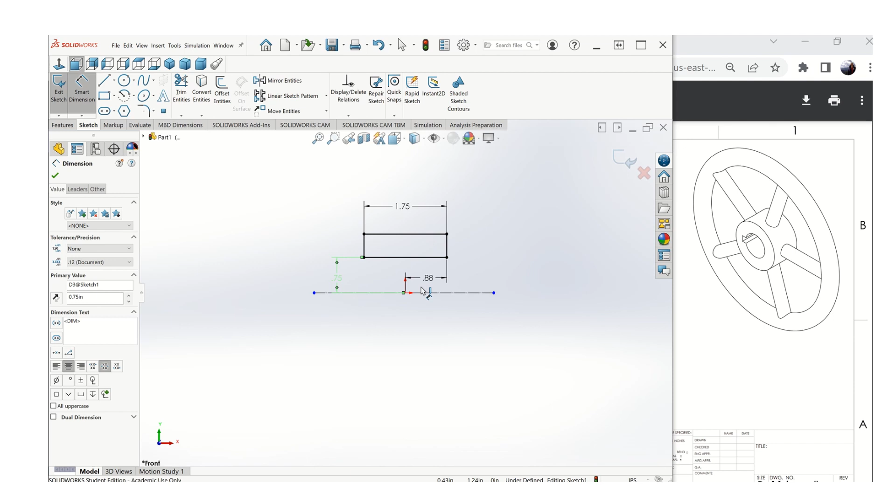And then this hub itself is a 3-inch diameter, so I've got to do half of that, because remember, when I revolve it, it's going to double.

So that's one piece. The other piece is the cylindrical part here, and we want to line it up there. I probably should just go ahead and put a construction line.

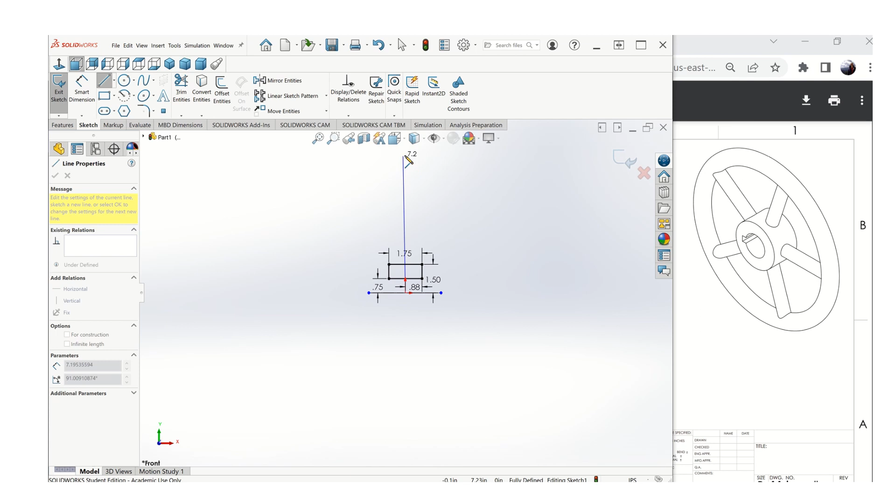And it needs to be a vertical line. There we go. So I'm going to put this on the line. That is this rim of the part, and that diameter of that rim is 1 inch. So that's the full size there.

And the distance from the origin to the center of that, because it's... let me try that again, from the origin to the center of that. Don't know why it doesn't like that. Let's look at this for a second.

So I'm going to revolve that hub, also revolve this. That's on a 10-inch diameter. We're going to go off the center of there, from the center of there to the center of the part. It's going to be a 5-inch distance. So that's 5.

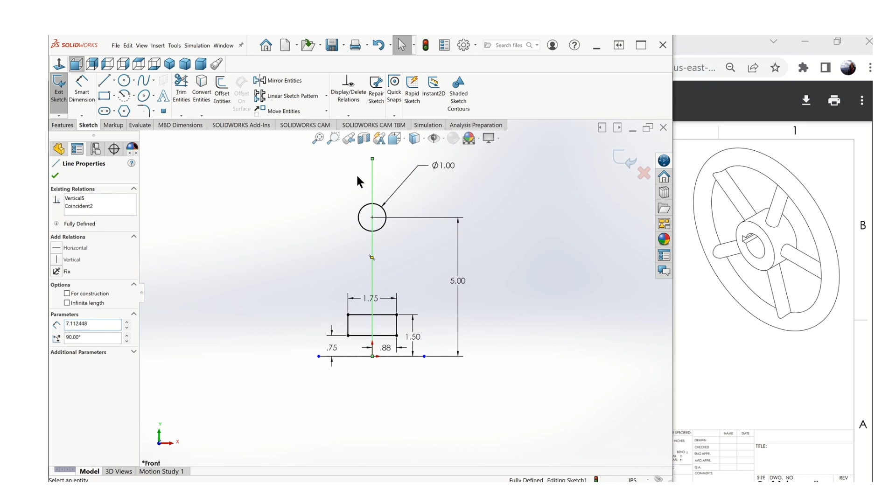I'm going to make that a construction line because I don't want that interfering with my geometry of my part. So I'll stop there and finish the sketch. Got these two pieces here.

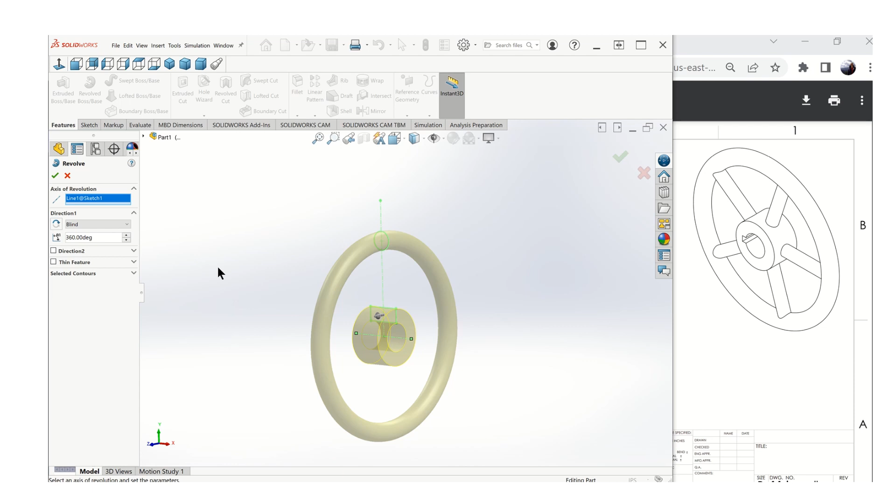I'll go to Features, Revolve Base. Now it's asking me for the axis, which is going to be that. And there's two areas there, so it will revolve both of them unless you deselect one. So that's the basic part of this wheel here.

Now the other tricky part of that is creating the spoke. So the way we're going to do that is, let's turn some planes on here. Actually, I'm going to turn all of them on, so it's going to get a little ugly here for a minute.

What I'm going to do is put a sketch over here, and then I'll extrude it to the rim and extrude it back to the hub to create one of these spokes, and then I'll do a circular pattern.

So in order to do that, I'm going to go to Reference Geometry, Plane. I'll click on this plane, and I'm going to flip the direction because I want it to go this way. And I just want it to be somewhere there in the middle.

Remember, that was a 5-inch radius, so what if I make that 2.5? Now, it doesn't have to be in the middle, but that works. So now I've got that plane. I'm going to turn this plane off.

I'm going to sketch on this one. I'll leave this other plane on there, these other two for reference, and that should help me with the center of this. Okay, now let's see what this looks like. I may have to change my visualization of the part.

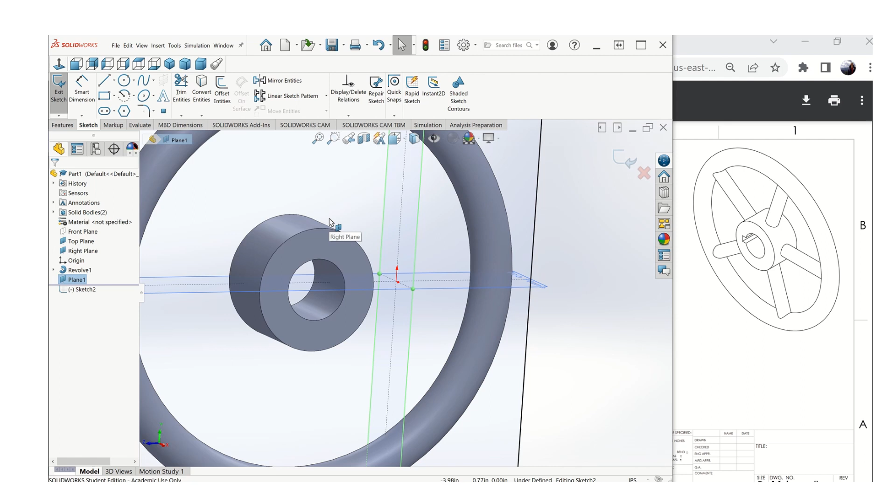So it's that right there, there we go. I'm going to do Control 8 to spin it around. Now I can't see what I'm doing here, so what I can do is change...

I don't have to go up there. I can go over here to display style and I'm going to get a wireframe.

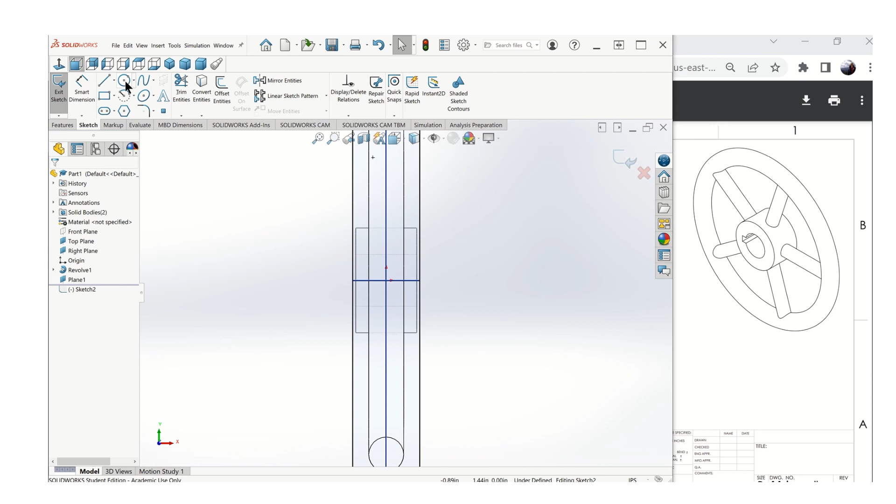Now I'm going to do a sketch right there. It's just a circle, and now that's going to be the diameter of the spoke. And if you look at the drawing, the diameter of the spoke is not the same as the hub. It's 0.75.

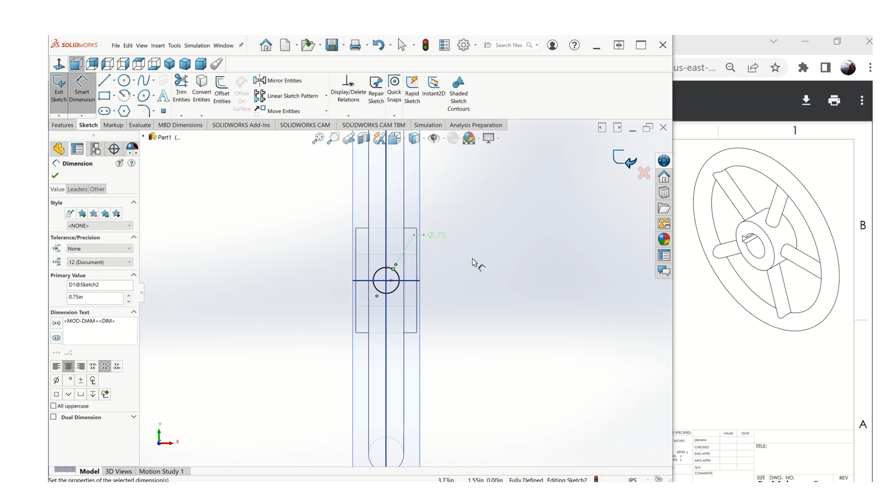Right, so it's definitely smaller, it should be all I need. Now look at what I have. So again, I'm in wireframe mode, so it's a little bit trickier to see, but I've sketched this, and that's going to be one of my spokes.

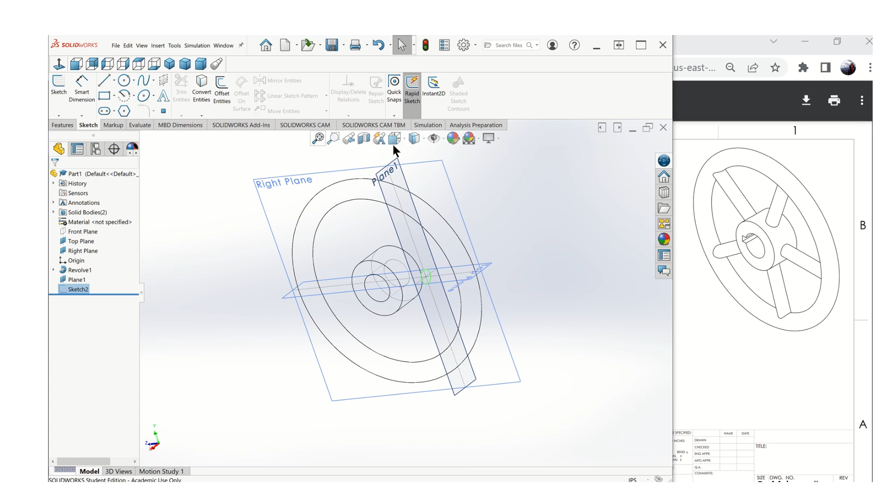And that plane, you could take this plane and go up with it and do the same thing. I just chose to go that way to the right. Let's finish our sketch, and change back to this format.

Now I will go to, I just want to do an extrude, I don't have to revolve. Click on that circle right there. And now the settings are going to be important, because I'm going to go up to next, and that's going to go that way until it hits there. And now that's in direction 1.

So you see this heading, I need to go direction 2. So click a check mark there, and I'll do the same thing. Go up to next, and then that'll take it up to this side. So direction 1 goes from here to here, direction 2 goes here to there. I could do it in 2 separate extrusions, but it's not necessary.

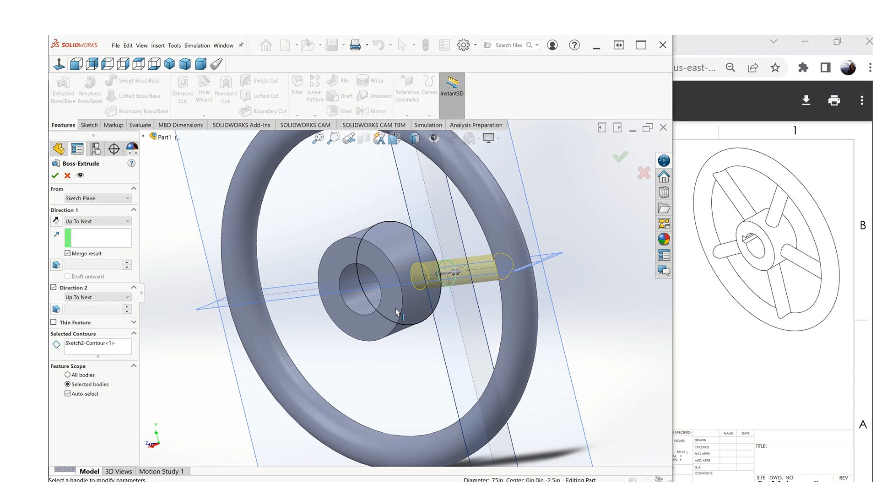Say OK, and there is my spoke, and it's correctly matched, mated. I'm not violating any laws of physics or anything like that. So now I have one spoke.

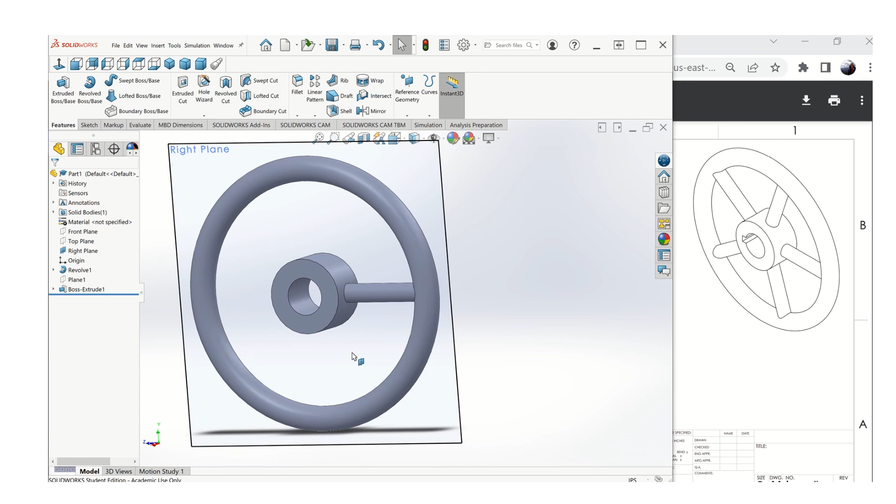Let's go back to our part. So what I did was generate this spoke here. Now I need 5 spokes around the circumference of that. So let's see, if I right click, I can turn off all these planes, it's a lot easier to see. I don't need that. You know what, I'm leaving that on for now.

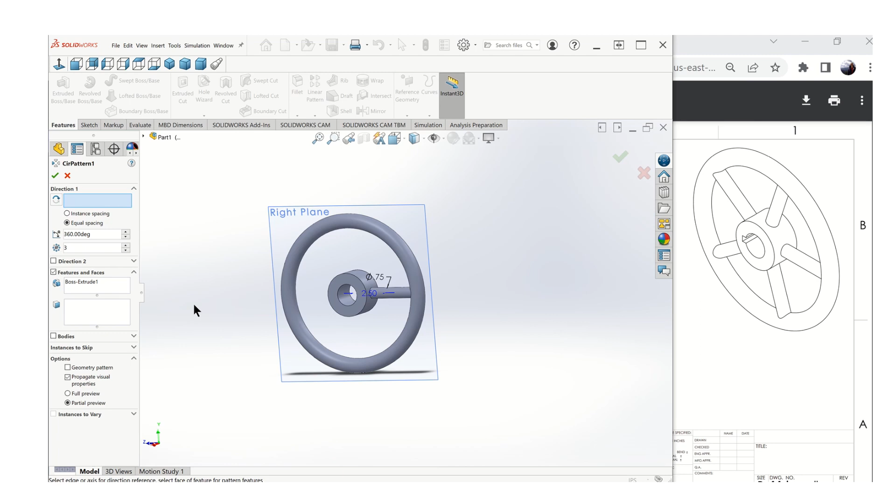Let's go up here to the top. We don't want a linear pattern. Go back to features, circular pattern. It's asking me for the features and faces. It's just that cylinder right there, and then go up where it says direction, highlight that, and then click on the center of your part, and then we need to look and see, we need 5.

So in there you want to put 5 spokes, and you can sort of see the pattern showing up. And there is my wheel, right? So I revolved those 2 pieces, and then I created that plane, extruded 1, and then a circular pattern.

The only piece that's left is there's a keyway in there, and that keyway actually is opposite of this one spoke. So it may or may not be randomly oriented, but let's assume it needs to be opposite that one spoke. So let's turn this way, and I'm going to click on that side because that's the view I want to see. So I need to put a keyway in there.

So let's just do a new sketch right on that surface there, and you can just use a rectangle there. Oops, forgot to look how big that key is. It is 1 inch from the center back, and it's 3/8 tall. So I need to dimension that, that dimension there is 0.375.

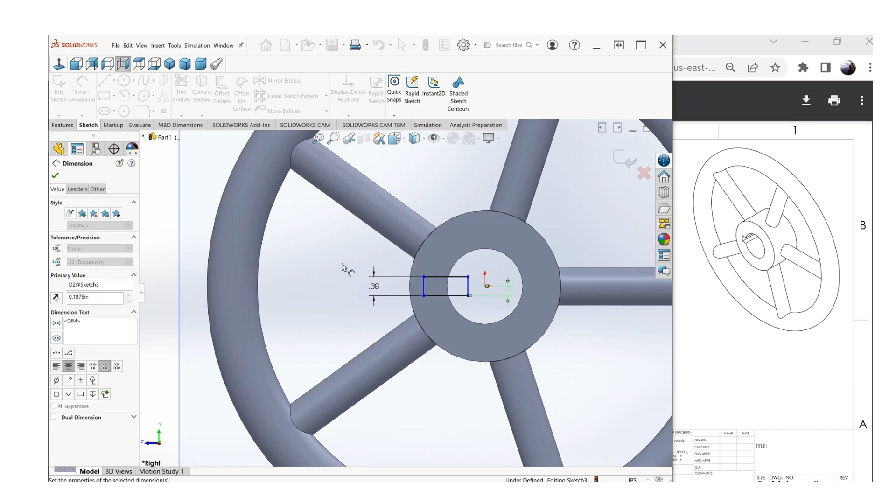Now you need it to be centered, so click on the edge and then to that center right there, and that's going to be half of 3/8, which is 3/16, which is 0.1875. That'll center that. As far as length goes, we don't really care about this part, what we care about is how long the key is.

So if you go from there to the center... may have created a problem for myself. Let's see. No, we're good, that dimension was 1 inch.

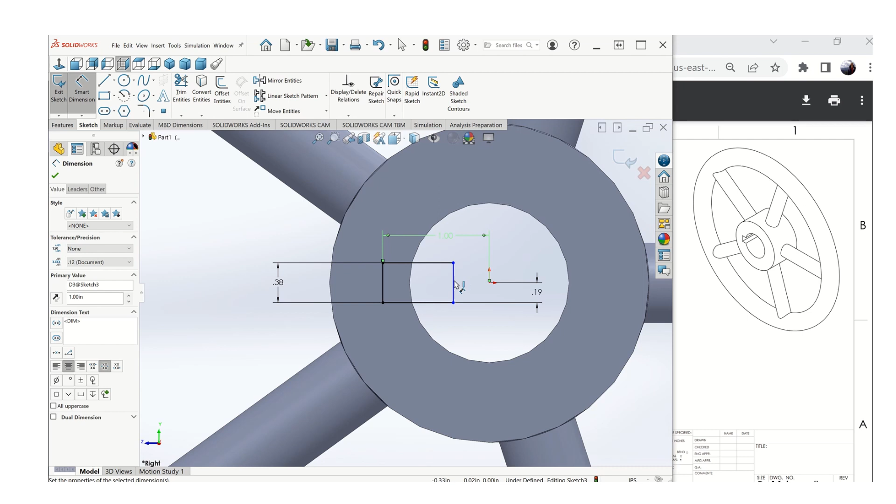Again, I don't care about this extra part, you can just leave it there. I don't care about that dimension as long as it's going to cut out that material right there. So there is my sketch on that face. Finish that.

Exit my sketch, go to features, do an extrude cut, and I need to go through all. And that creates my keyway. Right, so that looks exactly like this part, or it should at this point.

Now notice a couple things. We got a front view, we got a right side view that is in fact a section view that allows us to dimension these features without them being hidden. Also, they did a detail view of this keyway because it's a little tricky to dimension. You can fit it on there.

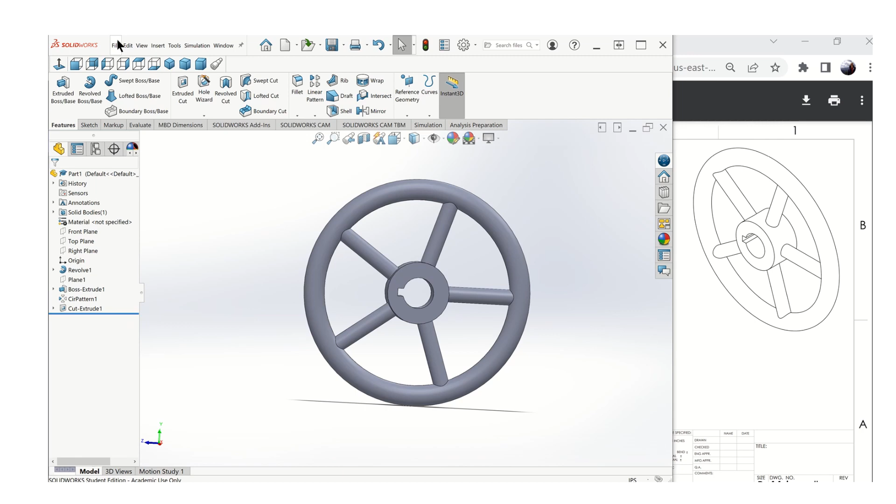Certainly. Let's turn off that right plane, we don't need that anymore. So let's save that, put it in the right folder. And that's going to be 11-inch pulley. Put on a drawing sheet.

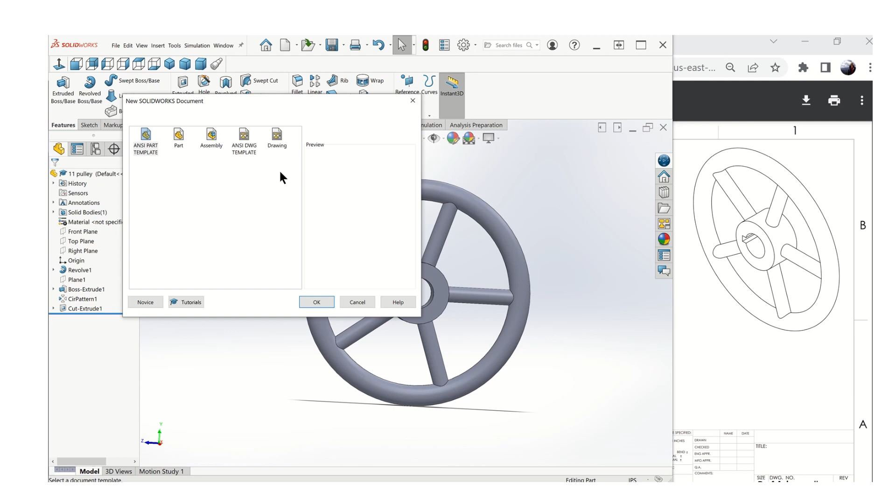Let me open that up and expand that. We want to just recreate this sheet right here, so follow along, should be fine.

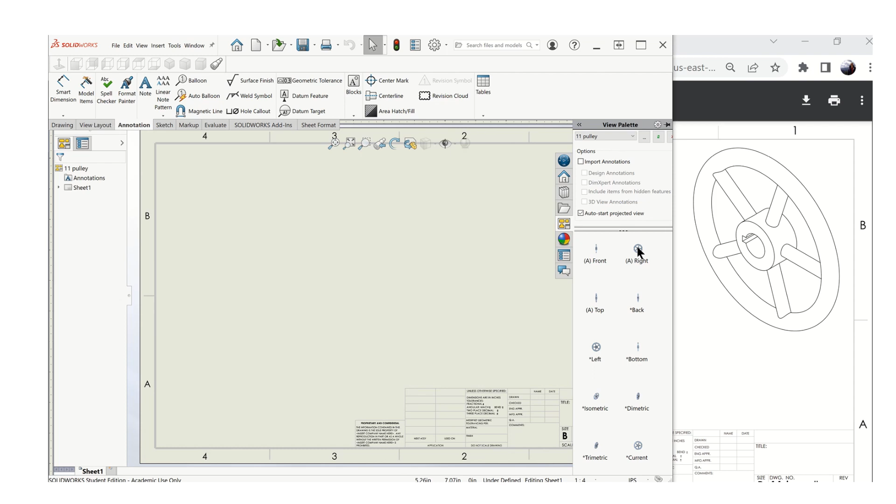Let's go to our view palette, find our pulley, look for views. We kind of want to pay close attention to the orientation here. This is the one, I know it's really small, but that's the one we want for our front view.

Now if we do a top view, this machine is struggling a little bit with our views. One thing is the scales. Well, let's talk about a couple things.

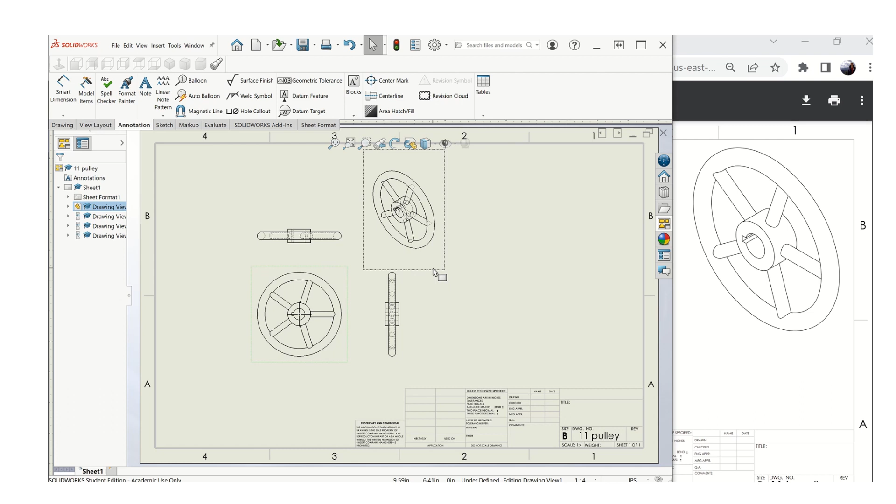Let's put the hidden lines on there. Turn the hidden lines off. Oops, turn the hidden lines off on my ISO. Scale isn't great, it's pretty small, but didn't want to do that.

Let's look at the views that we have. The top view and the right side view are the same exact view. Let's just delete that one.

Now that gives us room to adjust the scale of these. So if I go into my front view, let's look at the scale. Right now I have quarter scale. We can double that, go to half scale. That looks about right.

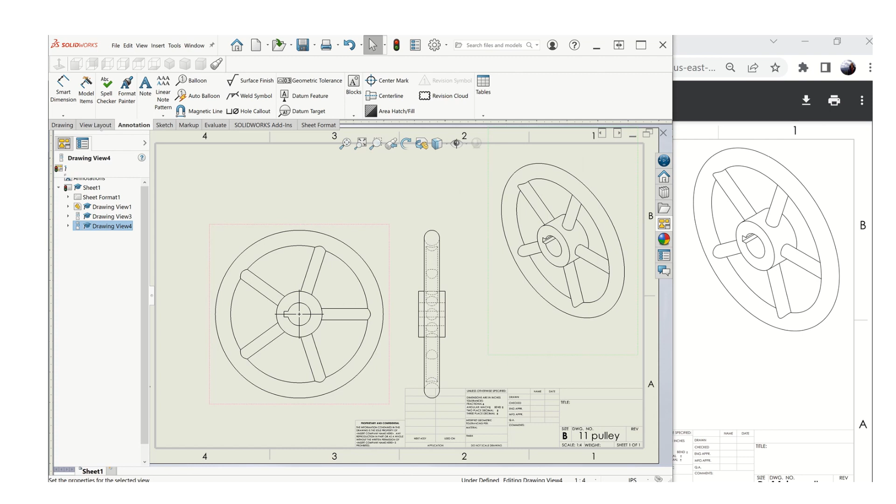Gotta try not to crash into my title block. Except this view is terrible, all those hidden lines are no good for me. Let's just delete that view and then replace it with a section view.

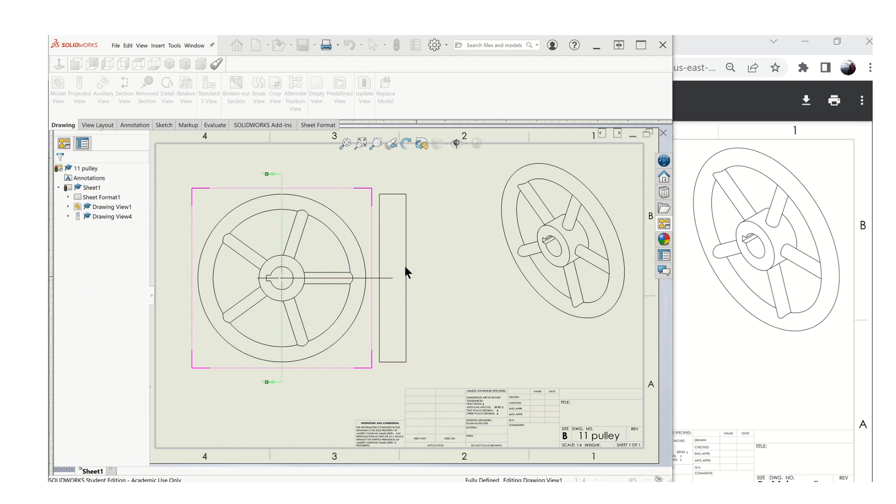So go to drawing, section view, make sure it's set for a vertical section. Pull that over, and that's how we'll get that view. It should be labeled section AA. Bump this thing up a little bit.

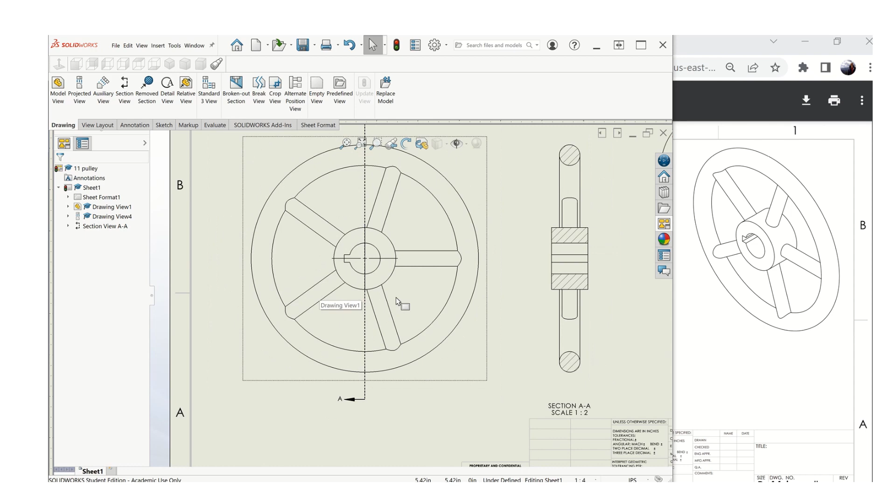And then we can put our dimensions on there. Now, one thing that is done in this problem is that detail view. So that's really handy. Oops, I don't need my part model, I need my drawing. Let's go ahead and make this bigger.

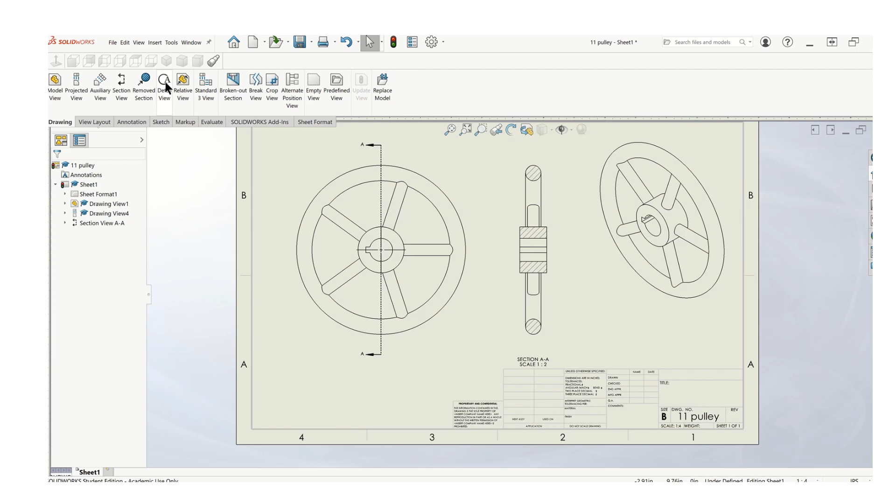Now again, in particular here, I've got a great place to dimension all my features that I need. I'm not dimensioning the hidden lines, but if we add that detail view—go to drawing, you've got a thing called detail view. Click on that, then come in here and click kind of in the center of what you want to grab, and make a little circle, then pull it out somewhere where you've got some real estate that fits.

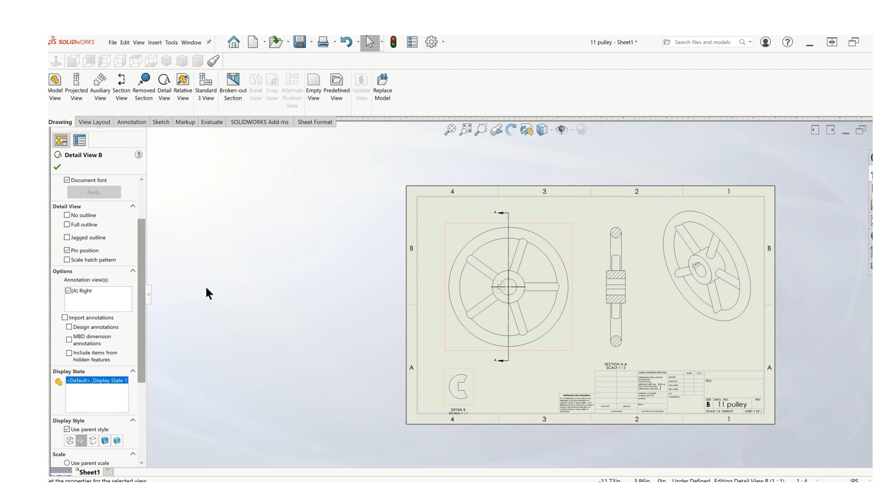What it's going to do is scale it up. Now a couple things it's going to do: one is it's going to call it detail B because we have section A—you don't want to confuse the issue by having another A. You can change the scale of that if you'd like; it's a 1:1.

That's of the actual part, not of this drawing. It's probably sufficient. I don't know, we could try to bump it up and do a 2:1—it's probably going to be gigantic. Yeah, that's kind of big, let's just stick with the 1 to 1.

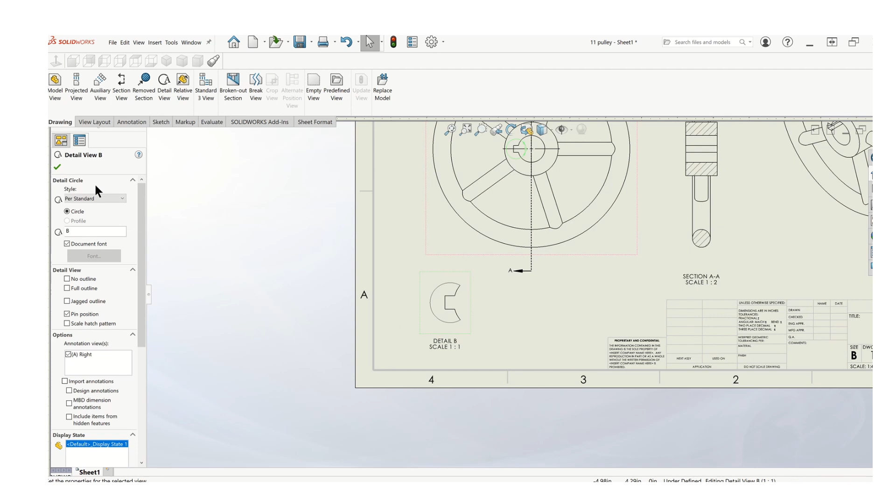Okay, so that's good, we got a little bit of leeway here. We can scoot—just make sure, I don't have any dimensions on this, make sure you've got enough room for your dimensions. So what I can do here, now notice it's clearly identified. Say, what the heck is this? If you look up here, you'll see that B, and this is labeled detail B.

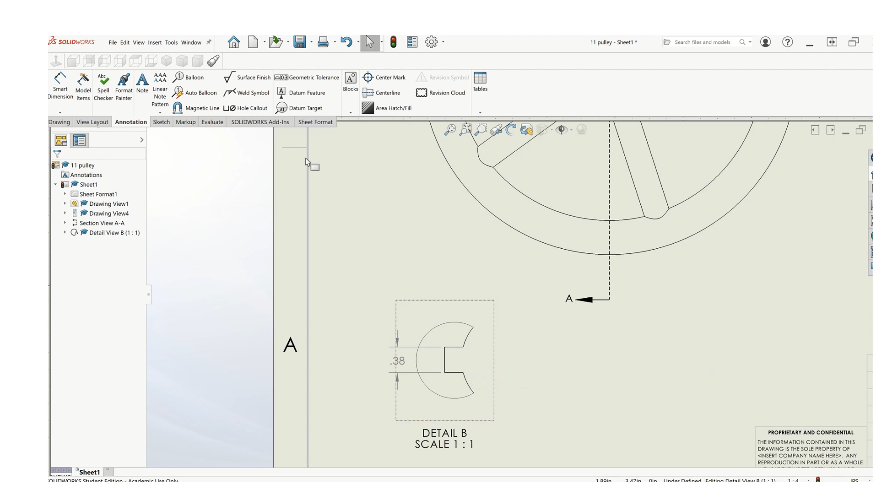So the advantage of that is that I have a clean place to put these dimensions, right? Now, what's missing is that center. Let's see if we can put a center on there.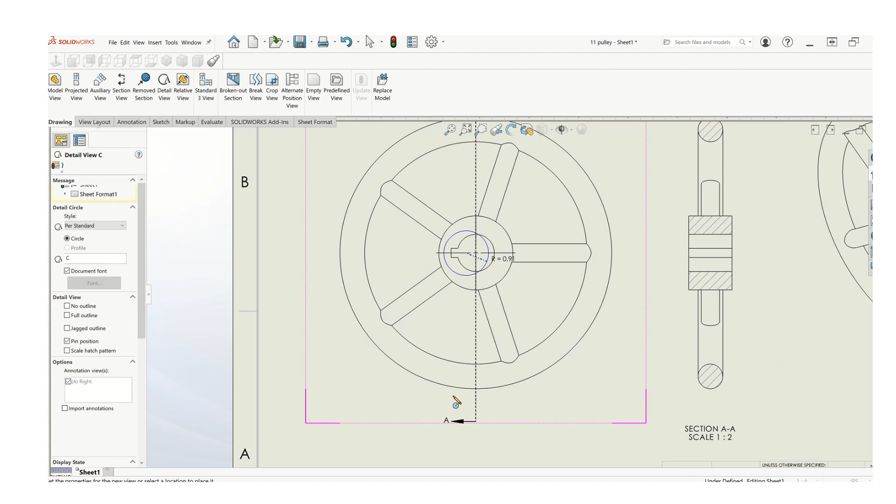Yeah, that's okay, let's do this again because I want to have that center on there. So when I do my detail B, I'll click a little bit farther over so I can grab the center. There we go, since I got plenty of room, that looks better.

Now it's going to say detail C because I just did a B. Just come in here, change it to a B, it'll match up. Okay, so there's our detail. Pull it up off there. Still didn't get the center.

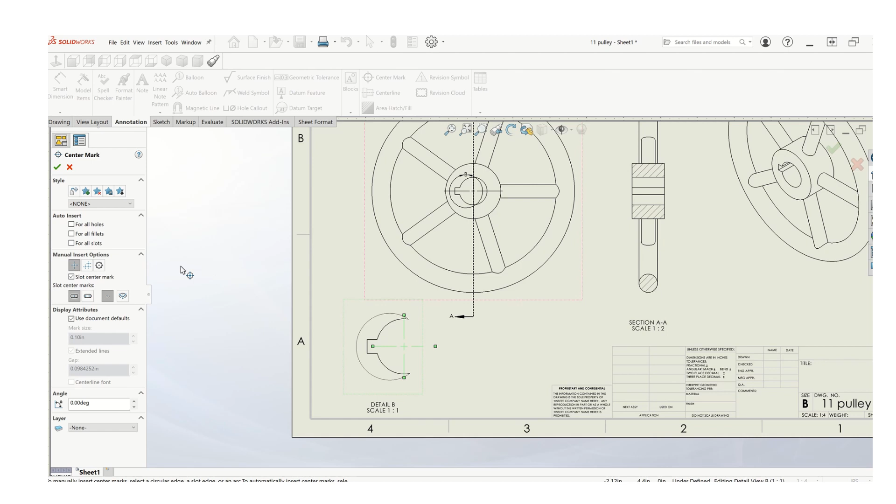Let's see what I can do. There we go, got it. Okay, so now I can dimension two things I need: the height of this keyway, and then I need to know the depth of the keyway. So that's going to be from there to there, which we know is 1 inch.

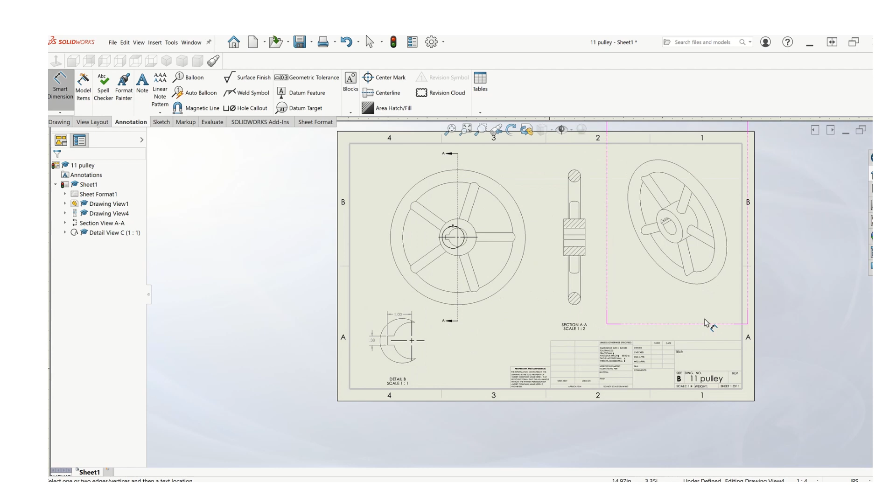Okay, so I'll leave you to put the rest of the dimensions on there and finish that up. But that's how you generate the model—a couple of new things in there, and then the drawing.